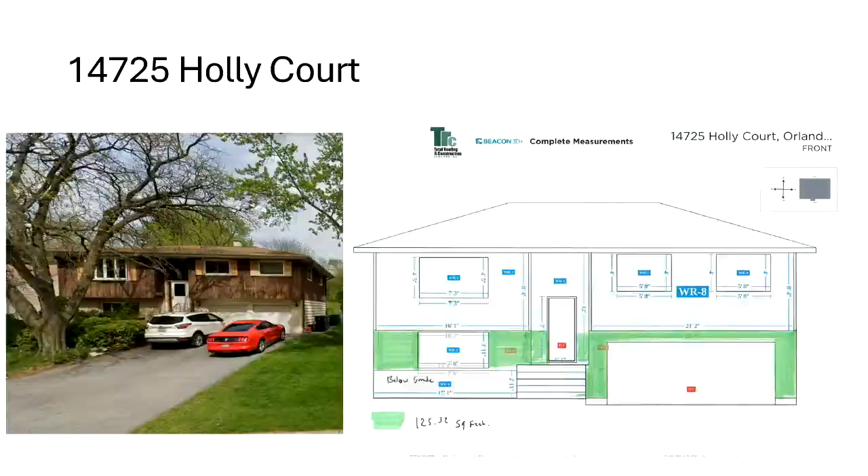The proposed variance would have no negative impact on the surrounding properties. It would not create undesirable changes to the characteristics of the neighborhood, and it would maintain the same or similar aesthetics. It is consistent with the original home and neighborhood, and as mentioned previously, many letters of support have been provided, and the variance would be in the best interest for maintaining the characteristic of the community. Next slide.

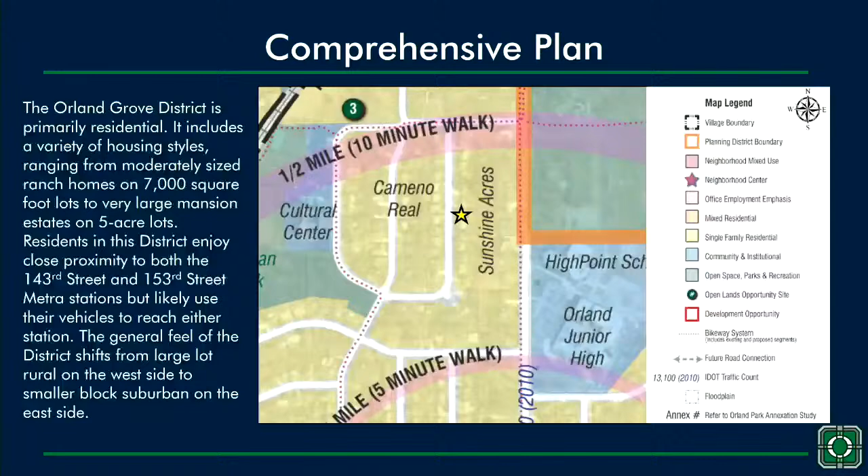This slide shows an image of the Orland Grove Planning District from the comprehensive plan, and the subject property is indicated by the star. The property is completely surrounded by single-family residential uses. Here is an image of the zoning map, again just showing that the property is surrounded entirely by single-family residential uses.

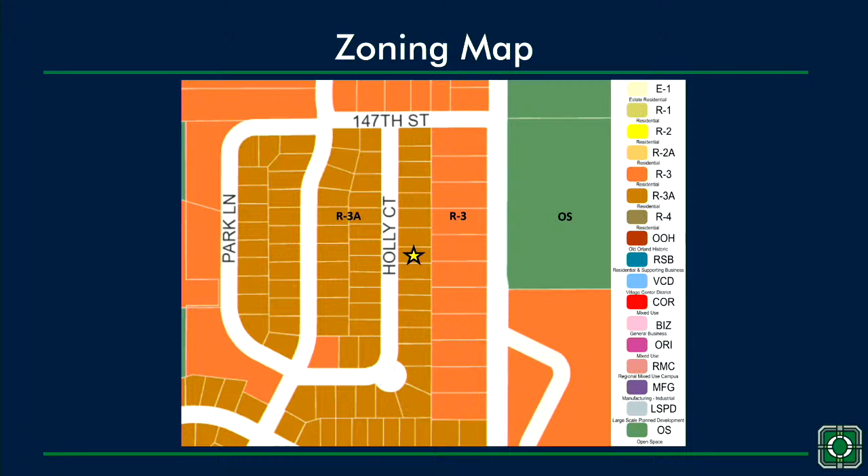Here is a recent aerial image of the property. As the petitioner mentioned, the single-family home here was originally constructed in 1968. It was a little over 1,000 square foot raised ranch-style home and was considered legal non-conforming to the Land Development Code because it did not meet the current code requirements regarding setbacks and design standards.

As they mentioned, in February 2024, the house was significantly damaged by a fire and then had to be demolished later that year as a result.

To provide a bit of background about the situation, the Development Services Department received a demolition permit application to demolish the house, the foundation, and the driveway in July of 2024, and the permit was then issued in August.

After the house was demolished, staff was then contacted by the contractor, stating that the property owners desired to keep their existing foundation and driveway instead of demolishing them. The foundation was deemed to be in suitable condition by their engineer.

Staff reviewed the plans to keep the existing foundation, and it was then determined that the foundation cannot be used to construct a new single-family home because it did not meet the current minimum side yard setback requirements for the side along the south property line.

Although the structure was legal non-conforming, the structure can now only be repaired or restored if it conforms to the standards of the current regulations for the zoning district in which it is located, R3A, because the house had already been demolished and damaged more than 50% of its assessed value.

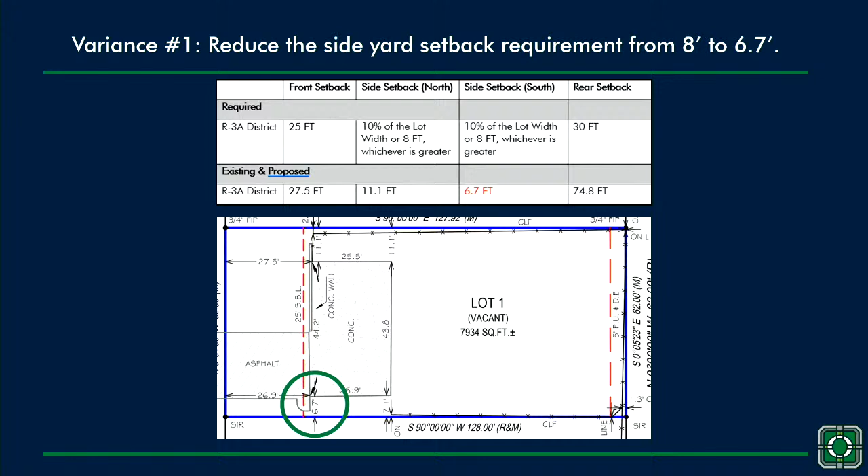Therefore, the Plan Commission is authorized to grant this variance request outright. If you decide to approve or deny the request tonight, it would not need to advance to the Board of Trustees for final approval. So you guys have the final authority to grant this variance.

And then here's just another image of the plat of survey, just showing the south side yard, 6.7 feet, that is deficient in our current requirements.

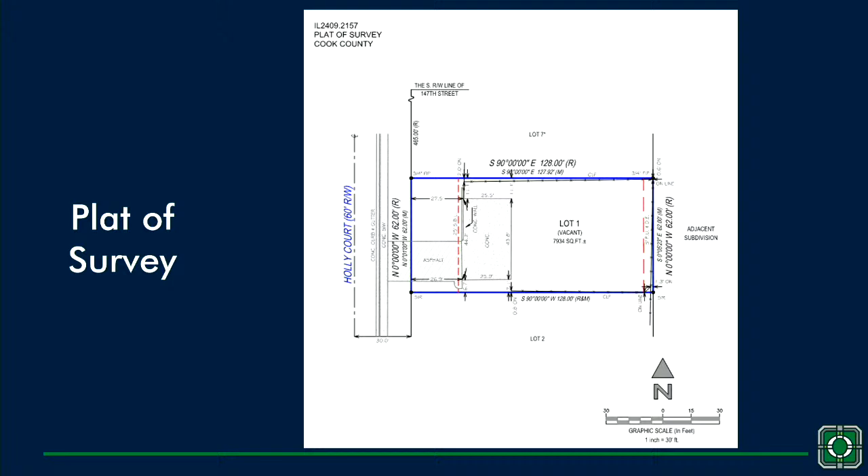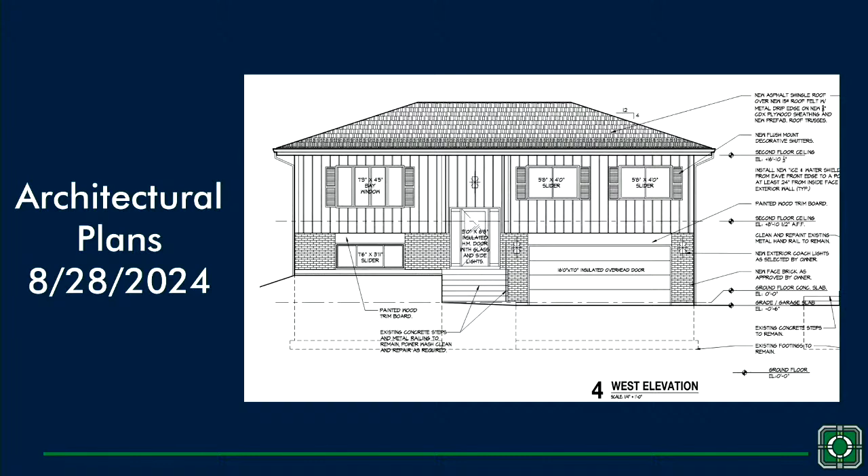But this moves on to our second variance request that's required. The Land Development Code requires that face brick or stone be utilized on not less than 50% of exterior walls and 90% of each first floor elevation for a residential dwelling unit. And they're only proposing to meet that requirement on the front elevation, or the west elevation, as shown here.

Therefore, in order to meet our code requirements, they'd have to have that face brick or stone on all elevations for the structure. Therefore, in order for them to use their proposed design, a variance from the design standards is required.

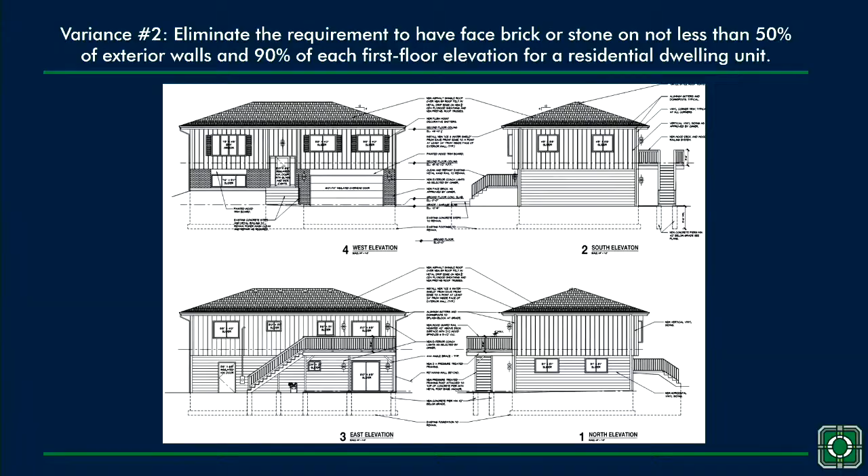And then, as consistent with any variance request, the petitioner did respond to our variance standards, which moves on to staff's recommendation tonight. Staff is recommending denial of the second variance request, as the reasoning for the variance cannot be due to financial reasons.

So finally, for the staff recommended action regarding case number 2025-0187, also known as the Gadauskas residence variances, staff recommends to accept and make findings of fact as discussed at this Plan Commission meeting and within the staff report dated April 11, 2025.

And staff recommends the Plan Commission approve a variance from Section 6-204.5E2 of the Land Development Code to reduce the minimum required side yard setback from 8 feet to 6.7 feet.

And staff recommends the Plan Commission deny a variance from Section 6-308F5 of the Land Development Code to eliminate the requirement to have face brick or stone on not less than 50% of exterior walls and 90% of each first floor elevation for a residential dwelling unit.

And this concludes the staff presentation. Thank you.

Thank you, Ms. Corman. We received 8 letters, and 2 of the people who wrote letters are here tonight. So would either Lori or both Lori and Craig Mandenberg wish to address the board?

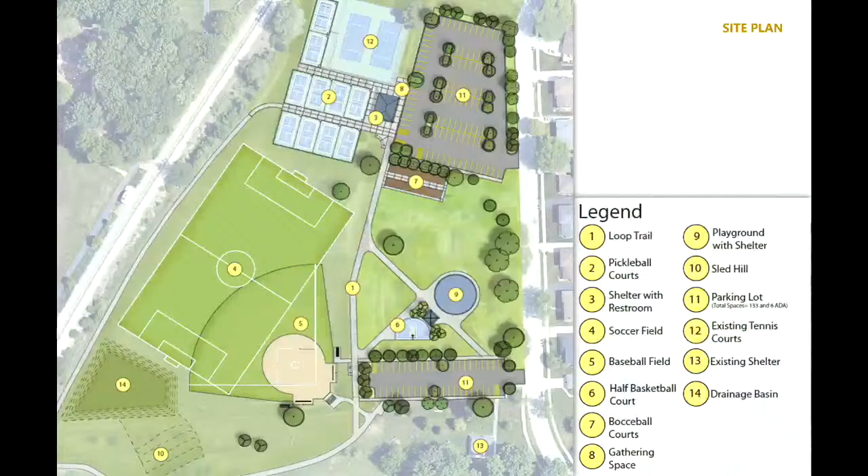On the next slide, you can see just the changes I mentioned. It's the same slide, but it shows removal of the bocce ball courts and the sledding hill.

This project has an OSLAD grant—an open space land acquisition and development grant from IDNR—in the amount of $600,000. So we first have to gain approval from the state to remove the bocce ball courts and the sledding hill, since those were approved with the original plan. I think we will be able to achieve that, but we do have to gain board approval and state approval before we can do that.

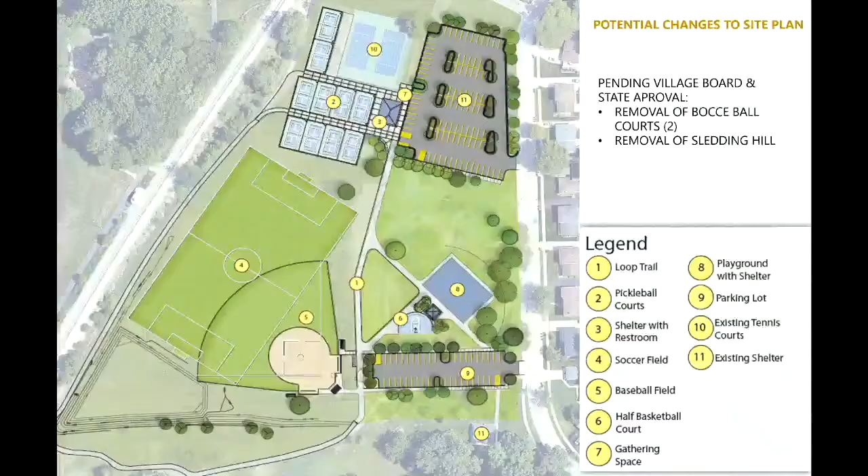In this layout here, you get a better idea of what the pickleball courts look like. You see 8 new courts there. The 2 in the upper part are pickleball courts, which will reuse some of the asphalt that already exists. That white portion is the existing tennis courts. Then you can see the shelter and all the sidewalk that supports it.

You can see the image of the pickleball courts on the right side of the screen. The whole complex of pickleball courts will have an 8-foot fence around it. We'll be adding wind screens to that at a later time towards the end of the project. I mentioned earlier we'll be adding lighting to the existing tennis courts. Each pickleball court will be separated by a 4-foot fence, so that provides secure play for the players where balls aren't going into each individual court.

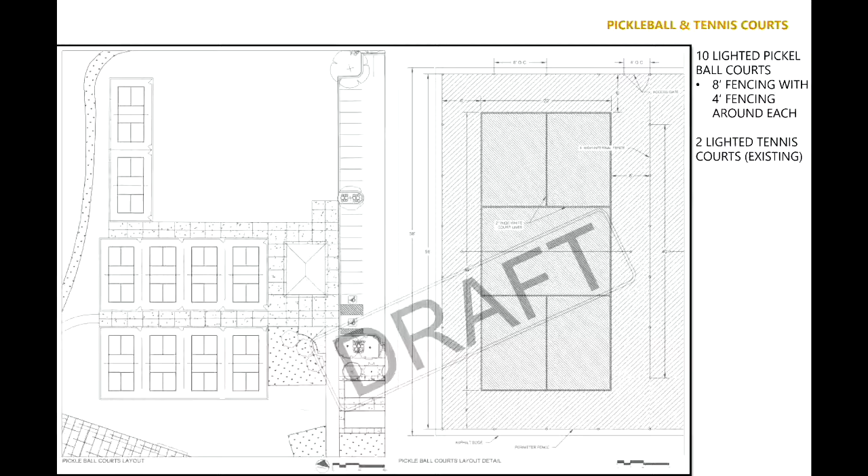In this slide here, you see the restroom pavilion building. I'm going to point to the west elevation there, which gives you a good idea of what it's going to look like. It has that open area for seating, and we'll put picnic benches in there. In the image on the south elevation, you can see the doors to the restrooms, which will be immediately to the left as you're looking to the east there, and this will be brick-faced.

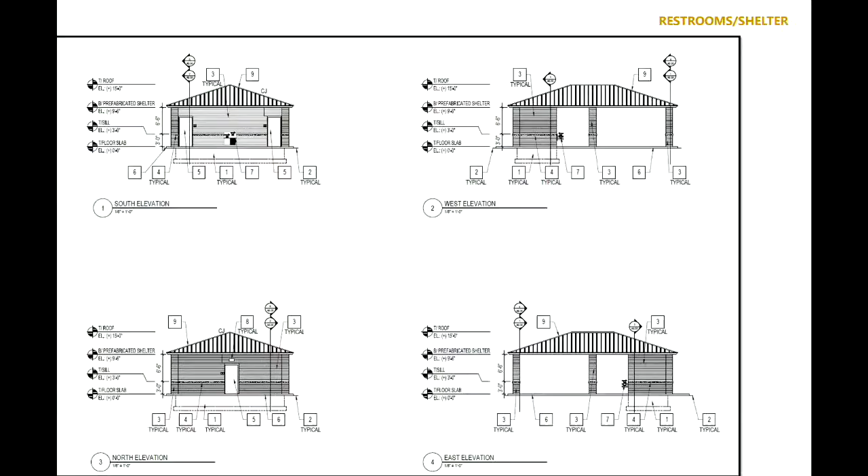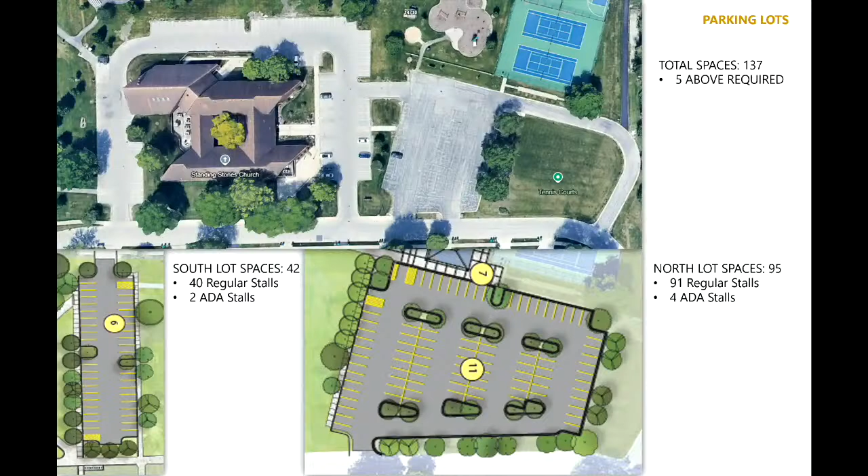These are the parking spaces. Starting on the north side, you can see there is pavement already, and then the location of the grass where RDC was. We're proposing adding and improving that parking lot, which will include a total of 95 spaces in the north lot with 4 ADA spaces. The south lot exists already, but it needs some squaring off. That'll have 2 ADA spaces and 40 regular spaces, 42 total. The total number of spaces will be 137, which is 5 above what is required for the parking lot.

This is what the pavilion will look like, next to the playground. This is a typical village pavilion—we put these in all our playgrounds. If you go near or around our parks, this is the pavilion you'll normally see.

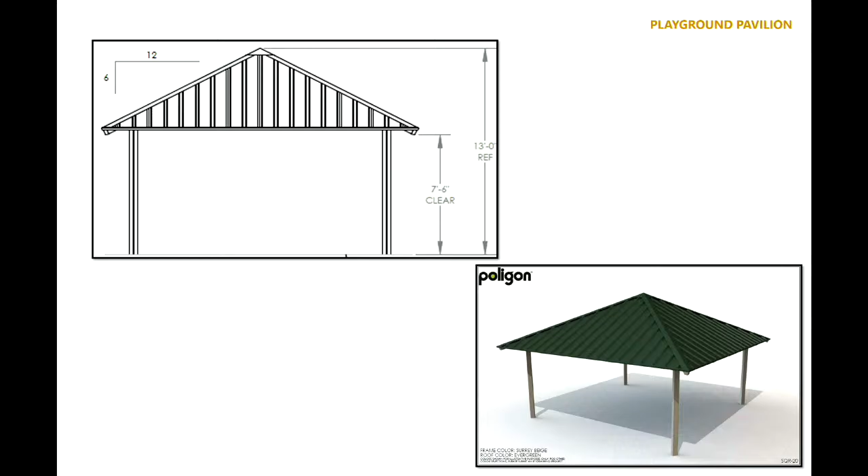This is the playground. The state has approved this playground as part of the OSLAD grant already. It has a lot of elements that our rec advisory board looked at. We didn't have any public attendance, but our advisory board approved this playground, and the village board approved it as well, so it'll be installed as part of this project.

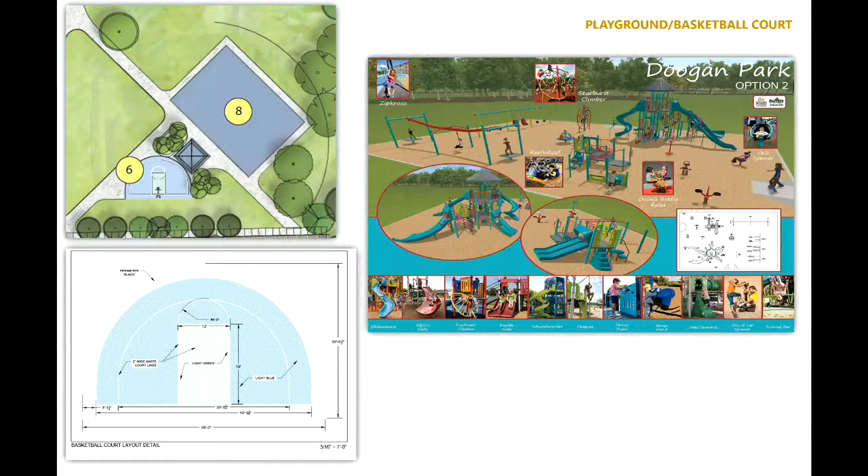You can see on the upper left where the basketball court is, next to that pavilion, which is that square building in relation to the playground. You can see the dimensions of the basketball court—it'll just be a half basketball court.

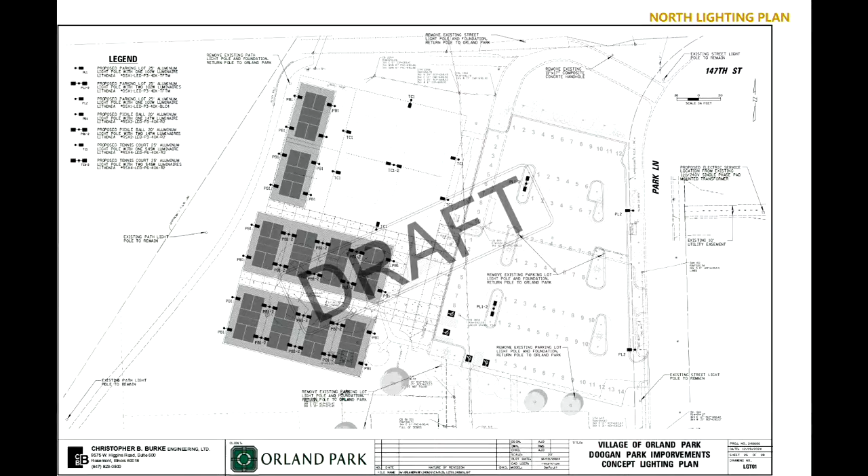These are the lights in the north parking lot, so we're only adding lights to the north parking lot. There won't be any lights in either of the pavilions or the basketball court.

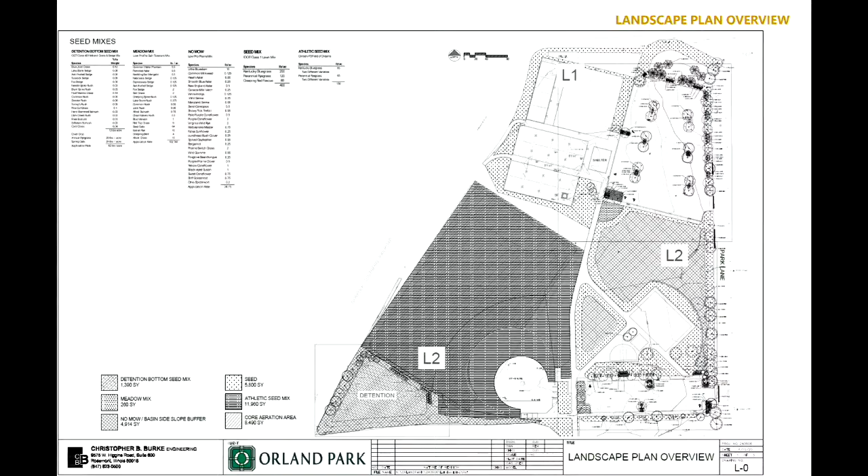This is the seed mixes in the different grades of shading, showing the different mixes that'll go into the space—athletic seed over on the fields there. No-mow is kind of an important seed for us, it reduces labor and cost. Some aeration and improvement—this is the seeding plan here.

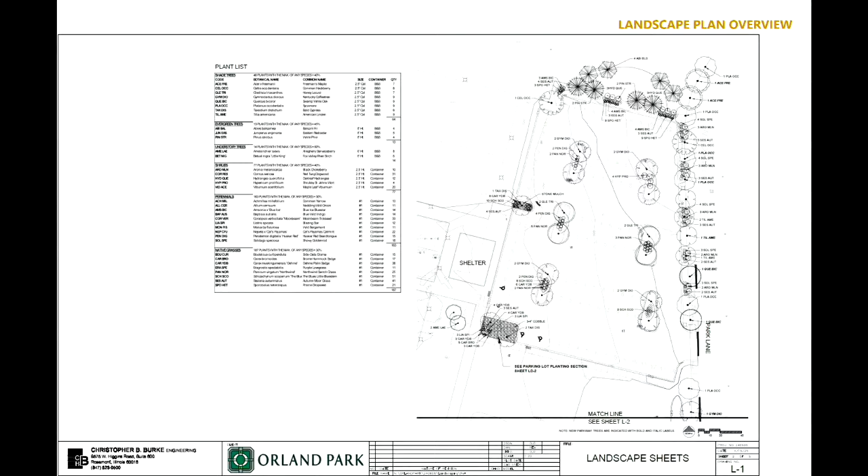And that is the end of the presentation.

Ms. Gorman. Thank you.

Okay, thank you. I would like to begin by requesting that the staff report be accepted into the record as written and as presented during this meeting.

Ray did a great job of summarizing what this project entails, but I'll get into the details of the zoning entitlements required for a project like this. This project includes a rezoning, a special use permit for recreational facility lighting with a modification from the Land Development Code, a variance, and site plan and landscape plan approval.

The subject property is located at 14700 and 14760 Park Lane. It's located within both the R3 residential district and the OS open space district. Under the comprehensive plan, the location falls under the Orland Grove Planning District with a land designation of open space, parks and recreation, and community and institutional.

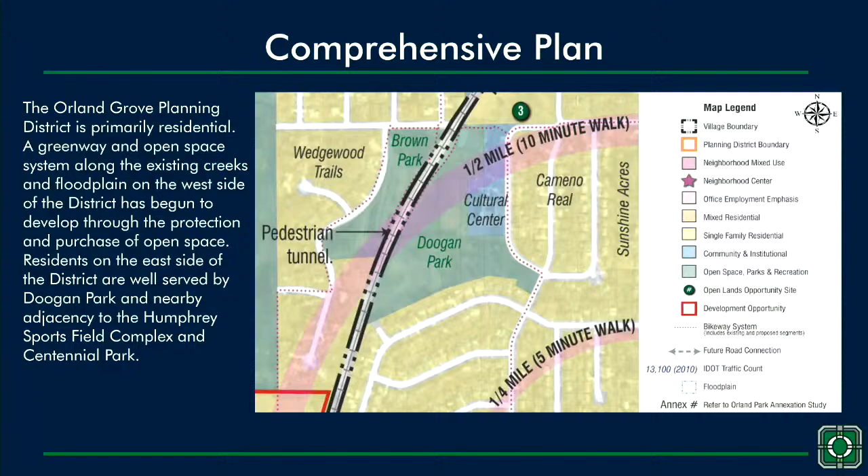This slide shows an image of the Orland Grove Planning District from the comprehensive plan. The property is bordered by single-family detached homes to the north, east and south, and then the railroad and Brown Park and more single-family detached homes to the west of the site. This can be seen here as well through a recent aerial image of the property.

To provide a bit more additional background on Doogan Park, it's located on an approximately 17-acre site that was previously home to the Robert Davidson Center, which was demolished in 2019, as well as the Village's Cultural Center, which was demolished in early 2024.

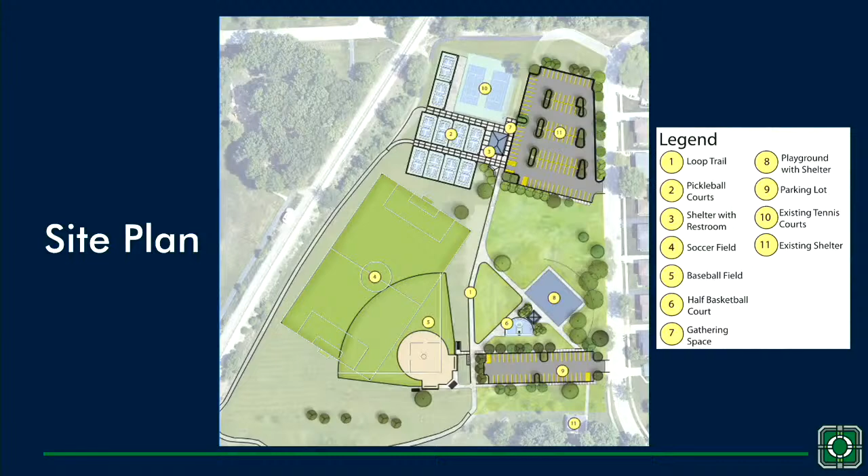Moving forward to the site plan, I won't go into the details that Ray already mentioned, but this is just an overview of the redevelopment that's being proposed for the park.

Part of this project includes the renovation of both parking lots, the north and south. They're going to be completely redone, which includes the installation of a north lot with about 95 parking spaces and a south lot with 42 spaces. Bicycle racks will also be installed adjacent to each parking lot. So the parking meets our current code requirements and actually exceeds them by quite a bit.

The first entitlement requested with this project is to rezone a portion of the property from R3 residential to OS open space. Rezoning these parcels will allow for the entire park to be under the same zoning district, which will be more consistent with the use of the property as a park. So 4 of the 7 parcels need to be rezoned, and they're the 4 shown in orange on the map here closest to Park Lane.

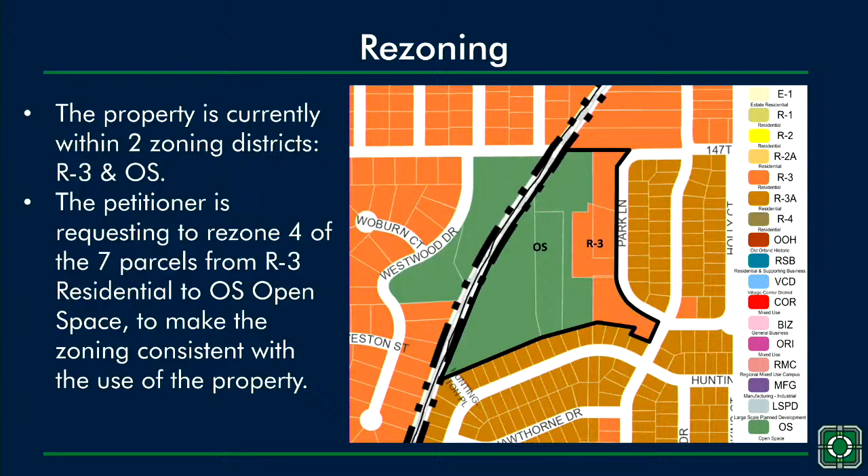Again, as part of any rezoning or zoning map amendment request, we're required to respond to the LaSalle standards listed here. Due to the responses to these standards and the continual use of the property as a park, staff is in support of the request to rezone 4 of the 7 parcels from R3 to OS.

The second request for the project is for a special use permit for recreational facility lighting. Because of their unique requirements for nighttime visibility and limited hours of operation, outdoor recreational facilities are exempted from certain illumination requirements, but are still required to submit a lighting plan and be processed as a special use.

As Ray already mentioned, there's substantial lighting proposed around the new pickleball courts and the existing tennis courts, as shown in this snapshot from the lighting plan. This will allow for the courts to be used later in the day after sunset. There's also lighting proposed throughout the new parking lots, and then existing lighting in the park will be maintained.

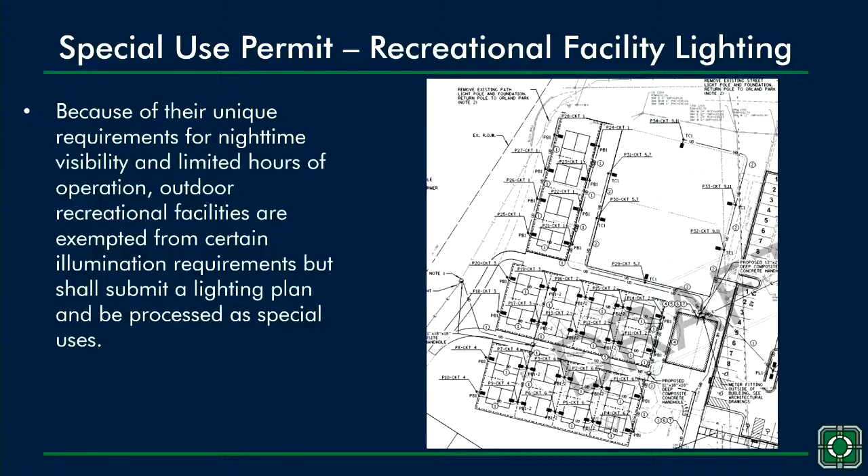The petitioner has also responded to our special use permit standards, and the responses just discussed that this special use will allow for the continued use of the site as a public park and will ultimately benefit the community by offering additional recreational opportunities.

The proposed lighting also requires a modification from the Land Development Code to allow for an increase in the maximum foot candle over the north property line. The code requires that there be no light spillage over property lines between residential and non-residential uses. However, the new lighting around the tennis and pickleball courts may cause a spillage of approximately 0.5 foot candles. For those unfamiliar, a foot candle is a unit of illumination produced on a surface.

Unfortunately, with the type of lighting that's proposed, shields cannot be added to the lights to reduce any light trespass, so the modification from this code requirement is necessary. Part of the reason this requirement is triggered is because the property to the north is zoned residential. However, any light spillage that may occur would be near the rear of that property, closer to the railroad tracks. Therefore, staff does not anticipate a major impact from any light spillage and is in support of this modification request.

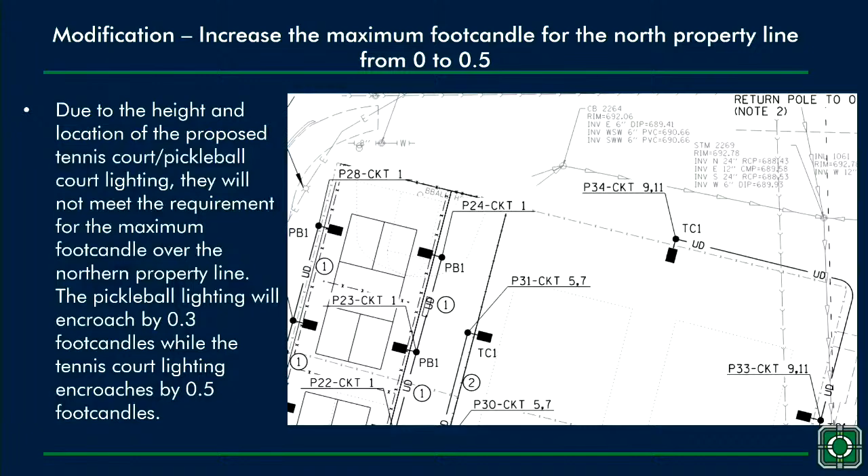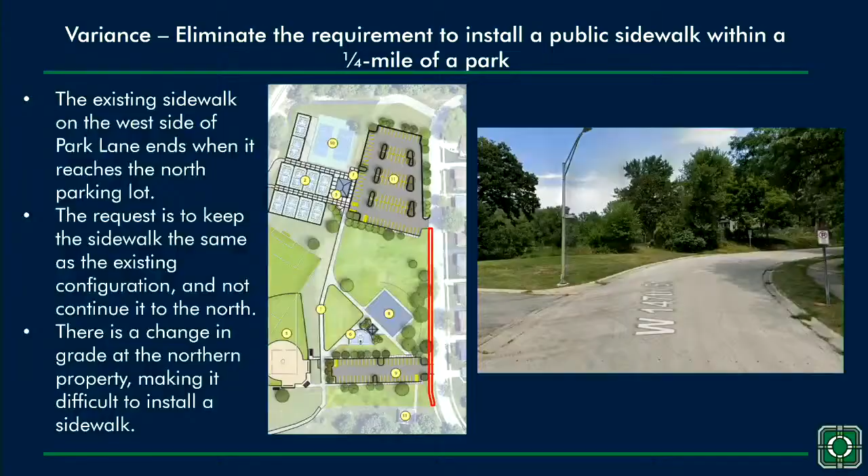The staff recommended action is over multiple slides, so bear with me for a moment. Staff recommends to accept and make findings of fact as discussed at this Plan Commission meeting and within the staff report dated April 11, 2025. Staff recommends the Plan Commission approve a rezoning of 4 of the 7 parcels from R3 residential to OS open space. And staff recommends the Plan Commission approve a special use permit for recreational facility lighting with a modification from the Land Development Code, subject to the following conditions.

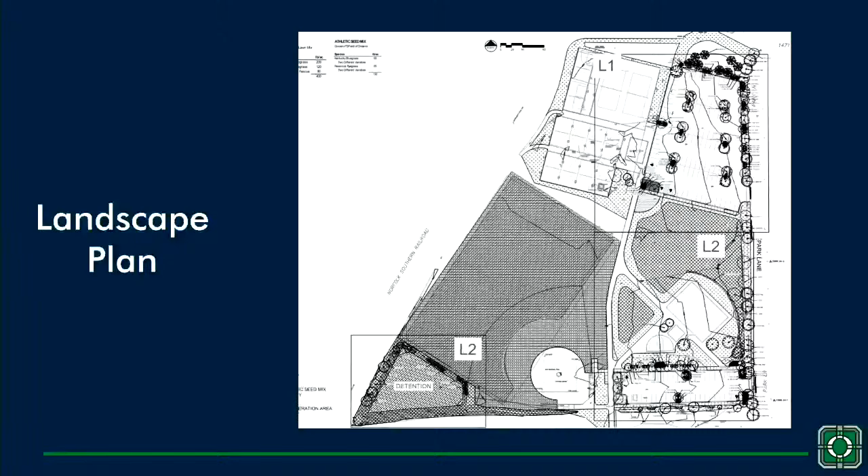No, it's to the north of it. It is where the detention pond is proposed and a little bit of the soccer field. The MWRD is south of it. Okay, I'm confused then, it's been a while since I've been there. You're talking about the drawing right here, right? Yeah, right there, the lower left corner there, but that's the furthest south part of the property, correct?

Well, no. Under where the green line is, that's kind of off screen - that's where the Frisbee golf and the hill and all that are located. So we'd be north of that. Yeah, but I think the old settling pond is under that hill you were talking about being the sledding hill. It's both. The aerial images and the information we were able to get kind of say it was mostly on the southwest corner of the site. It's hard to exactly figure where it was, but it's generally in that area.

I gave Mr. Piattoni the name of the village engineer who retired about 15 years ago, but he'd been here in the 70s, that would be a good resource. His name was Andy Bosma - you might contact him, he still lives in town. He can probably give you a lot of information about when that facility was decommissioned, what was done to decommission it, and what's underneath the ground.

Yeah, we've done geotechnical investigations, mostly for pollutants and things like that. The site's pretty clean. We don't have any information that indicates anything is still buried under there. We've reached out to MWRD, who own the facility, and they don't have any information one way or another. So we are going to assume that everything is clear on site, and if not, we'd have to deal with it come construction time.